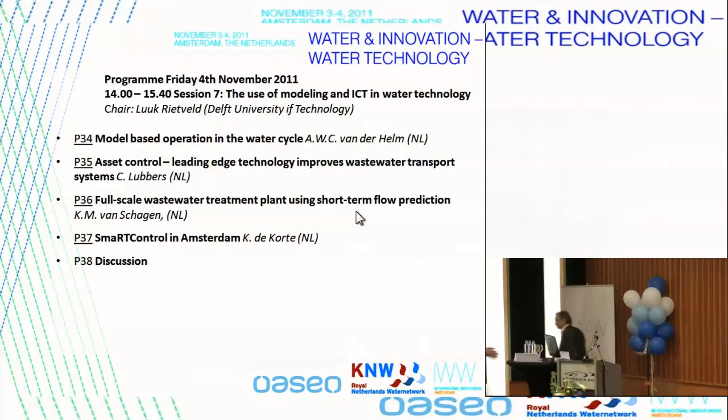My talk will be about a full-scale water treatment plant, and what we did there at this full-scale water treatment plant. We improved performance by using short-term water flow prediction. We did this research, or this implementation research, together with the water board of Vallei en Eem, and together with a colleague of mine and two people of Vallei en Eem.

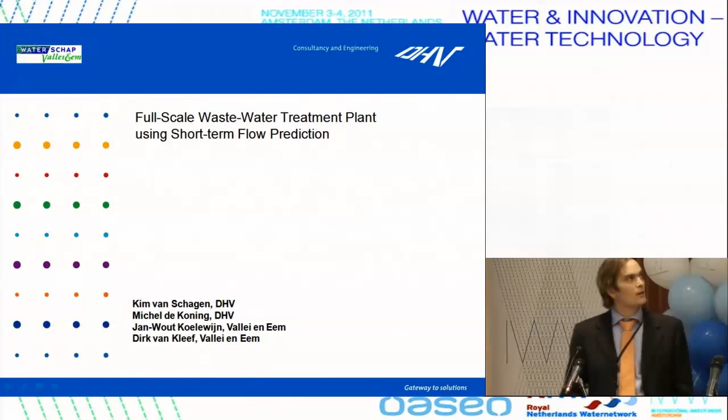So what is it all about? What you want to achieve with the water treatment plants is that you want to have minimal environmental impact. That's the most important thing. Of course, minimal cost. Cost saving is important. And not only during a study phase or during a troubleshooting phase, but you want to have it always.

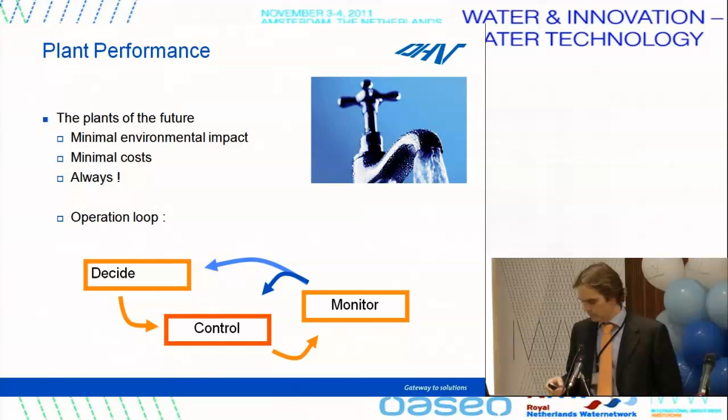Not only today, forever. So what you have to do is not only improve one time the control, the central part of it, but you also have to monitor the control, like with an iWatt or something like that. But also you have to decide afterwards, okay, I have certain performance, what should I do now? Improve my control, or decide on other operational points. So that's the operational loop you should be in if you want to improve your plant performance all the time.

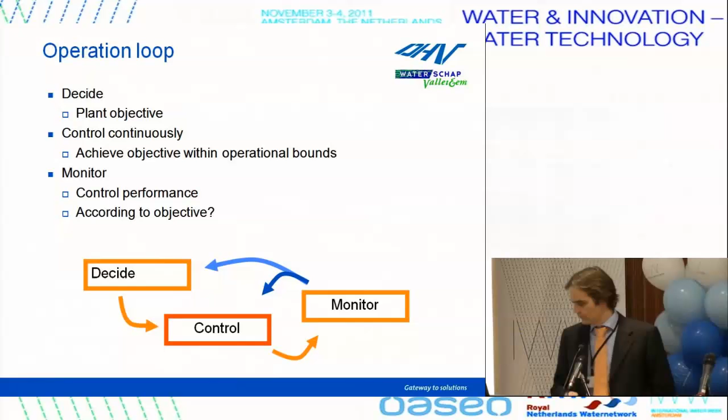And that begins, as I said, with deciding what is the objective of this plant, and use that objective and not something else to determine your control. What do you want to achieve continuously? And therefore very important discussions are: what is the objective and what are only the operational bounds, so what are the boundary conditions within which this plant should operate. And afterward, of course, monitor it, and decide, is it according to the objective, or does my objective not fit.

Well, now I will show a little bit more about control. If you go to a wastewater plant, you want the objective, of course, minimal environmental impact. So what should you do there to achieve this objective? If you look at wastewater, at the regular situation, the most important reason to have control at a wastewater treatment plant is to reject disturbances. You have disturbances from your wastewater load all the time, and you have to take care that these disturbances will not end up in your surface water.

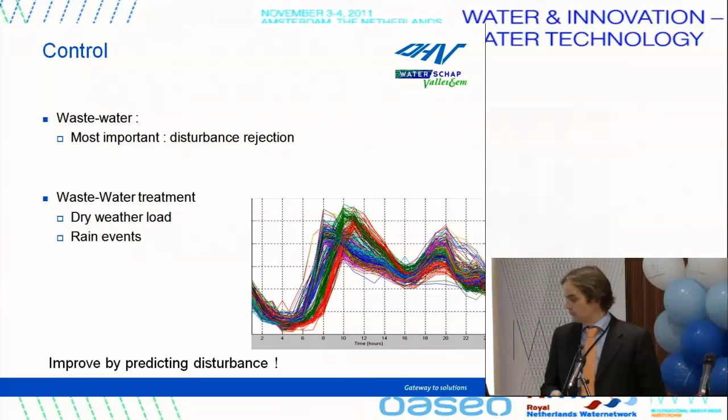And so our hypothesis, our idea here was, well, in drinking water we predict already for a long time. For wastewater, we can in that sense do the same. The same people who are consuming are also producing the wastewater. So if you take the same prediction scheme as we use for drinking water, maybe we can improve plant performance by doing that for wastewater. So predict wastewater load, in that sense only wastewater flow, assuming constant concentrations. That's again an assumption.

And well, how do you predict? Historical prediction, it's called. So based on the historical situation, what happened in the past days, you of course know what the next days will do. People don't change their behavior that quickly. And of course you have to validate the data in case of situations which are not common, you say, okay, this was a strange day, but you can quite easily recognize the pattern of normal dry weather load. In that sense, you have an adaptive forecast of your flow for the next 24 hours.

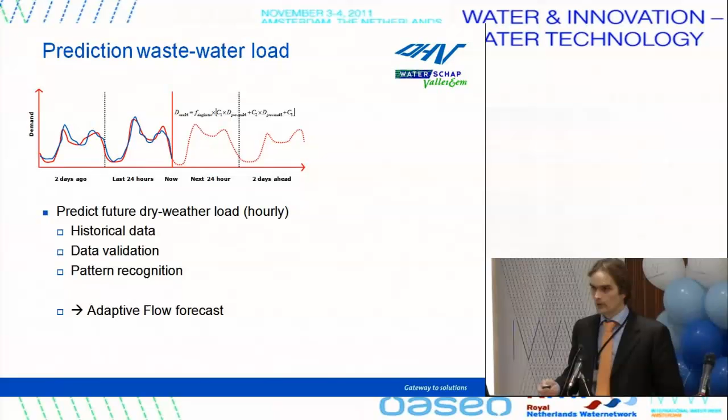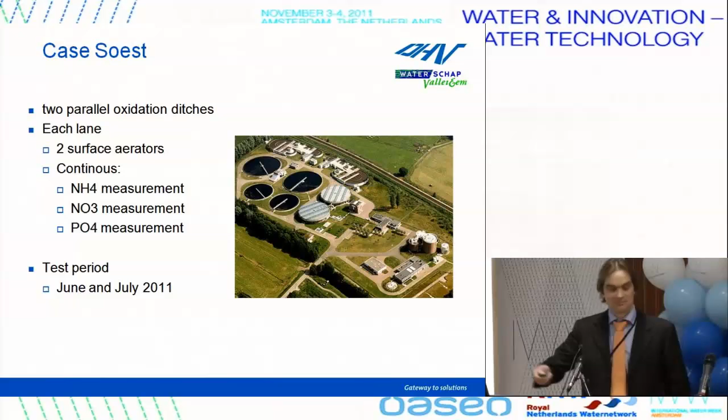And what we wanted to test was three control strategies. To begin with, it was a fairly dated installation, and they had only oxygen control. So very simple oxygen control, an oxygen measurement, some kind of PID controller, which determined how much oxygen, how quick the aerators would blow and how much oxygen was entered into the water.

Well, the first control scheme proposed by the water board, and which was quite common at other installations, that we say, well, we extend this one simple control loop, which they trust very much, and say, well, my oxygen set point is not fixed, but I change it during the day based on what my ammonia measurement is. Ammonia is one of the important values which have to be kept below a certain value. And then a fixed ammonium set point, and this ammonium set point was very conservative.

And why? Because they say, well, if it's too high, we have chance of phosphate release, and then we have a problem with our phosphate concentrations. So phosphate was not in the control loop, but they decided on changing ammonium set points based on these phosphate boundary conditions.

And then we said, okay, let's turn all the world upside down and say, well, what is the main thing you want to control? Well, the main thing I want to control is ammonia. So why not directly control ammonia? And I said, well, there's a boundary condition. I want to have a limitation of phosphate. So why don't you bring in phosphate in this control scheme? So mainstream is ammonia, but if phosphate gets a problem, it takes over.

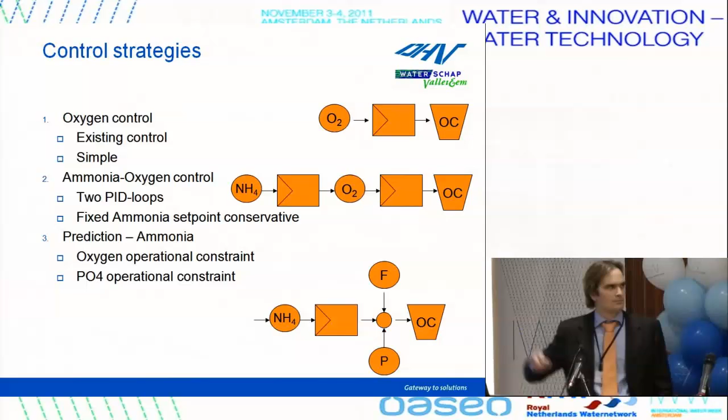And the next thing is you say, well, I know something will change today because every day is the same in that sense, and we can predict what will happen. So why don't we take in this information we have already and bring it into the control scheme and change my aeration based on my predicted flow? So not wait until ammonia is too high and then run after it and try to repair the error that occurred, but start aerating before that ammonia increases, because I know today the load will increase. It's quite a trick to get.

Okay. And of course we wanted to try to have a fair comparison between the three control strategies. Well, the oxygen control was there all the time, so we had a lot of historical data about that one, so we didn't have to bring it into our test scheme. What we then did was for the two lanes, every week we switched the two lanes for oxygen cascade control or this predictive control. So the cascade control is ammonia, oxygen, aeration.

We started off with both lanes on the same control to compare, okay, if the control is the same, they should behave the same. And afterwards we flipped them every week, and that for in total 5 weeks. So you see the scheme here.

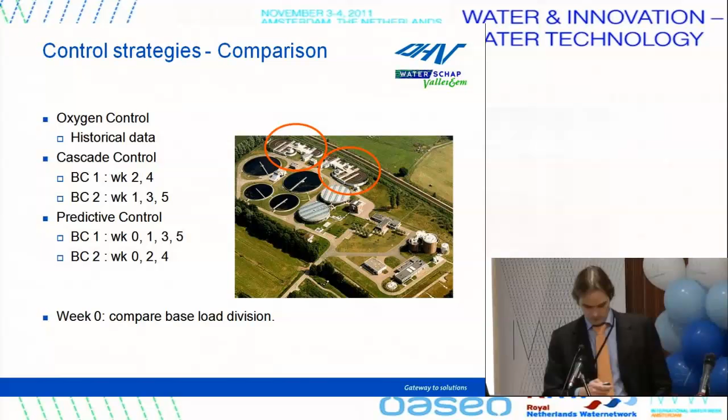So then the results. To begin with, of course, we want to see this behavior, which is quite common in drinking water. 1/3 of the Netherlands has already a scheme like this. So is this scheme also for wastewater? Does it hold? Well, not very astonishing, but also for wastewater you can very commonly predict the dry weather load. So this is the dry weather wastewater load of the people living in Soest.

And as you can see here, for the people that can read Dutch, on Wednesday it rained a lot, and you can even calculate in the supply area how much rain has fallen. And the same here also. So two things very easy to see. You can see normal dry weather load, so for optimizing the normal situation. And on the other side, especially during low dry weather flow, you can easily see that at this moment it starts to rain already.

So rain events for a wastewater installation are more like, okay, now run like hell because you won't make up for it, go. So if you detect rain, start all aerators and hopefully you will hold during the rain period. So in this case they can already start here at full capacity because they know it has started to rain and we have to treat all the water coming.

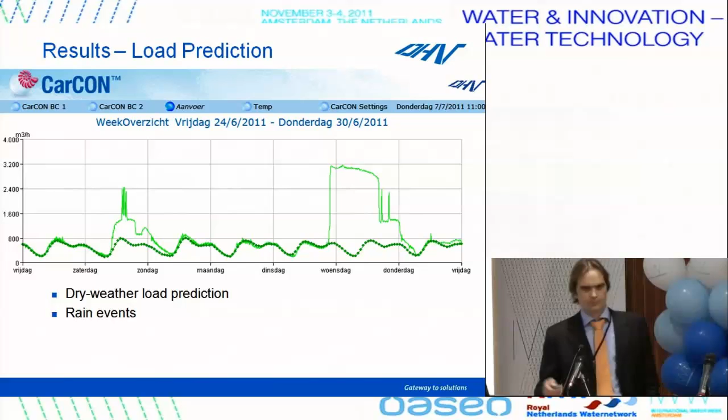So if you then go to the three control schemes, we use this cycle of controlling, monitoring and deciding. First of all, to explain these three, the same sheets. This is where you can see what the decision is. They say, well, I have nitrate on this axis and ammonia effluent concentration on that axis, and my target is I want to have my treatment plant inside this green rectangle. That is the place I think my plant is running well. If it goes to yellow, it's not so good, and the red part is where I don't want to be. So that's the decision that is made.

Now, what does this do? For 1 week of operation, I draw a dot, and the size of the dot is as big as the period in this week you have been in this situation. So you see, not so strange, in the case of oxygen control there's no relation to ammonia. The oxygen control merely kept nitrate at a certain level, but ammonia went all the way, which is not strange because it was not in the control. So they were happy when this happened, to say, well, everything is within the green, and in fact it's what we wanted to achieve.

But then if you go to predictive control, what you see is that you can even narrow down the range of ammonia, which is the main target. And at that point, you're doing too good. So this line here, this 1.5 ammonia, can go up a little bit because that's inside the situation you want. And as soon as you bring ammonia a little bit up, you save even more energy because you don't treat that part of water you don't want to. So that is in this way.

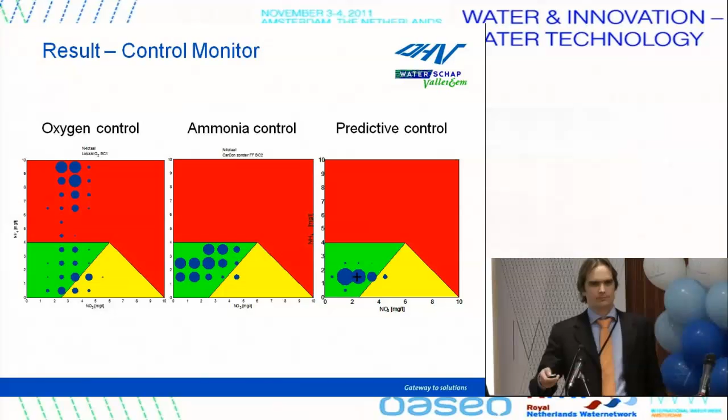And if you then look in more detail at what it means for this predictive control situation, this is a graph of the controller itself, and I hope to explain a little bit how the prediction works. So there was a flow prediction, and we saw that earlier. This flow prediction on the bottom part is translated into this purple line. If there's this flow, this is the amount of aeration that's necessary in a normal situation. This is 1 day. Of course, you also measure ammonia. This is the red line here. You see it goes up a little bit around this 1.5, which was desired.

And what you do is say, well, I follow my prediction, except for the case that ammonia is too far off. And what you now see is that you don't need big perturbations of ammonia, and you already start decreasing or increasing aeration. That helps prevent over-aeration, because as soon as your ammonia gets high, you have to compensate for the too much ammonia and control it back to the normal value. Because you are already reacting on the estimated flow which is coming, you don't wait until ammonia has gone up. And that also helps you save energy. So your control is less extreme than if you would only go to ammonia control.

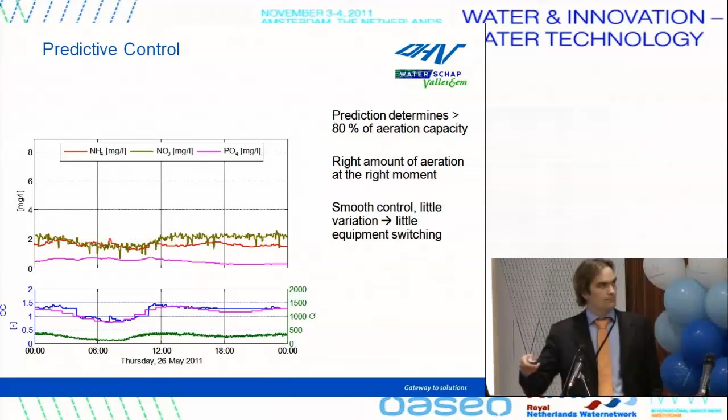So what we then compared, the most important part for them was, okay, ammonia is a flat line. That's what we want. Second part, of course, is the cost. They want to reduce costs. This graph with a lot of numbers is interesting to read in the paper, but in a graph it means this. In week 0 we had the same energy consumption, which is logical, with the same control schemes, and then in these 5 weeks we switched between one lane and another lane between the controls, and compared the predictive control and the cascade controller, and you see that consistently the cascade controller uses more energy to achieve the same goals. So even where ammonia concentration at the end is lower, you have a saving of about 3.5% of energy.

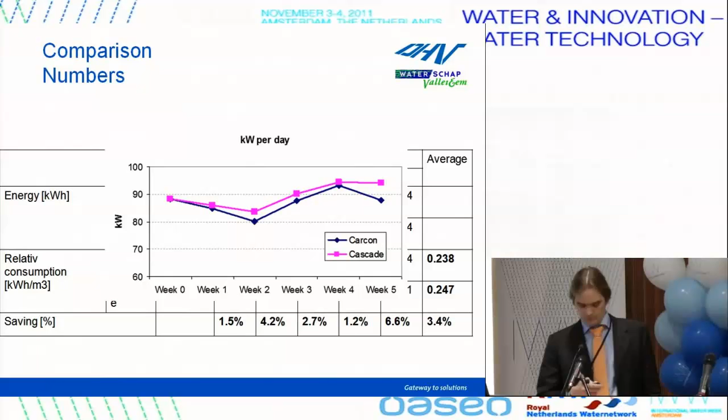So to conclude, you can predict the disturbance of your wastewater plant. You know what's going to happen, so it's well predictable. You can integrate it in a quite simple aeration scheme, and that helps you keep your effluent concentration constant and close to what you want to achieve. It helps reduce energy. And the nice thing, it's very understandable for operators, because experienced operators work in the same way. They look at yesterday and the day before and say, well, normally this happens, so today I do almost the same. And an important effect is that you can really quickly detect a rain event, even at the first drops of rain, without rain apps and rain radars, and already detect, okay, something is going on, I have to aerate.